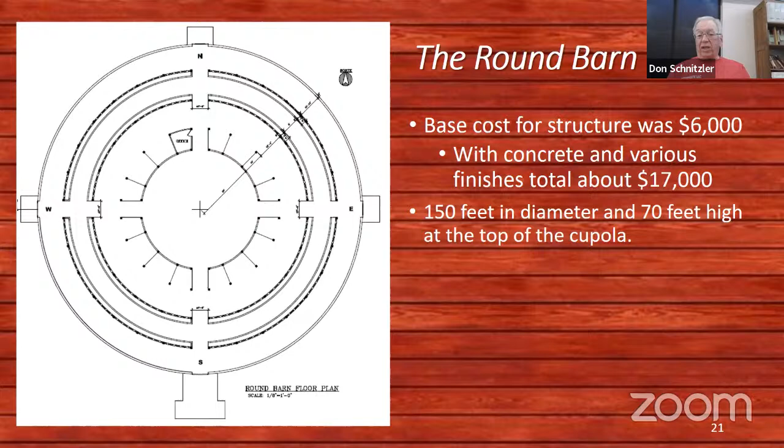And once they had that, the first job, and it was literally the first concrete job that Felhofers did, according to a history I read, was to pour the round wall that surrounds the perimeter of the round barn, which was done on Thanksgiving Day in 1915. And they mixed all that concrete by hand. And then before the building framing could begin, they poured all those, you see in the picture, kind of pyramids, which were the piers that the 8x8 posts sat on. I didn't take the time to count them, but there's a lot of them. The posts had to have a foundation, so they poured all of those.

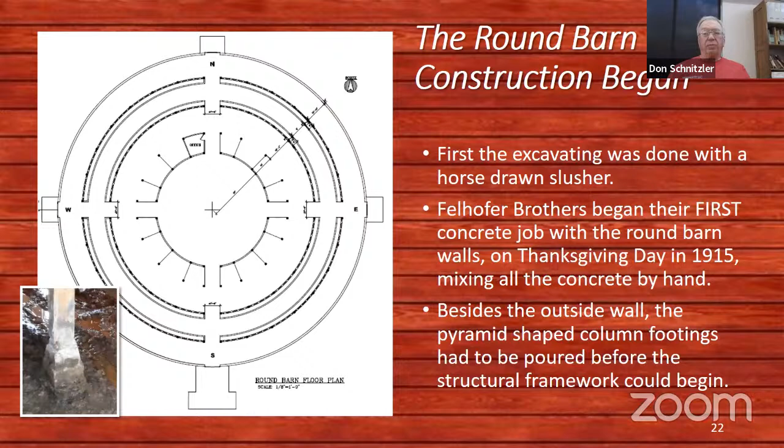So I hope when you go into the round barn and you go up into the center section, it's beautiful. It's a work of art to me, because I actually had a hammer in my hand in my life. And I appreciate the labor and the beauty of that round framing, and the difficulty.

Every board was cut with a handsaw, and lots of those cuts were miter cuts where there was an angle, and maybe some of them were an angle and then a compound angle. And that was by men who used a framing square to mark that with a pencil. Even if it was a compound angle, I don't know how well you can see that, but they followed that pencil mark around that miter cut with a handsaw, and it took a carpenter to do that kind of thing, and they were.

So it's different when you stand in that round barn. That picture doesn't do it justice, but you look up and look at how much structure there is up there, and that every piece was cut by hand. And think about that.

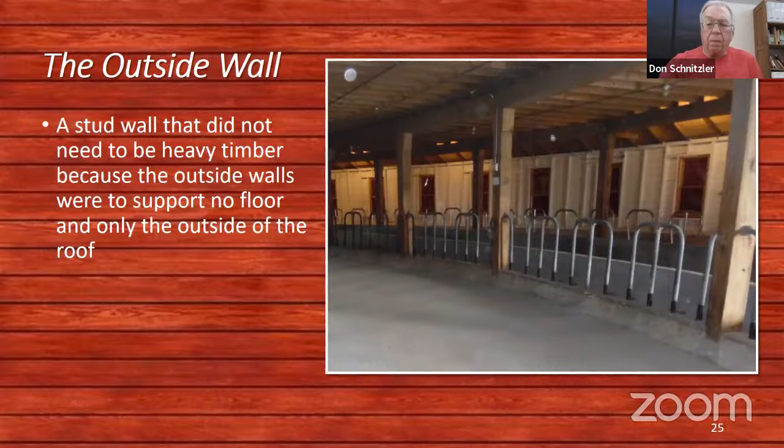It illustrates a little better, but in some of the drawings, and we'll have more in the pictures, there were 4 rows of columns that went all the way around the building toward the center, and that's what supported all the roof load and eventually the second floor load, the building weight and the live load, which is snow and ice and anything movable that would have been on the second floor.

And this picture is kind of neat because you can see some of the old stanchions. So this is a very original picture, and you can see the roof when you were out there by the stalls because the second floor wasn't there. So this picture is between 1916 and 1920, in that ballpark, when that floor was put in.

So the outside rows were solid squares. They took a log and sawed an 8x8 out of a red oak or white oak log. And that's not hard to do if it's, say, up to 20 feet, but when it gets 40 feet long, if you did do it, how do you keep it straight?

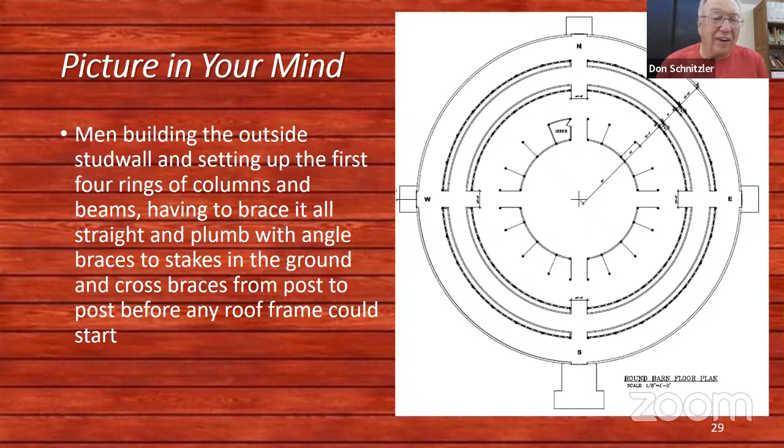And I picture carpenters like this didn't settle for pretty good. They had to be straight. And I've known carpenters like this that were old guys when I was young, and they got it right before they started putting a roof on it.

So once they got the columns set, they could begin building the roof framing in the winter. They're working off of ladders, and they're starting to build staging where they ran plank across from the outside wall over to the rows of columns, and they laid plank flat so they could walk on them and have some place to stand. But it gets high after a while, and it's slippery and it's cold because this is all winter. Think about that a little bit. There were no man lifts, no forklifts. They didn't have a crane, so that was all Armstrong and all climbing.

These round ring beams are kind of a mystery and a work of art, because you can see that they're pretty big. If the round barn was 150 feet in diameter, I don't know the diameter of the next one, the second one in from the stud wall, but it's big. And I can't imagine them building that up in the air. I think they would have built it on the ground and wrestled it up there somehow. I haven't read anything, but how'd they do it?

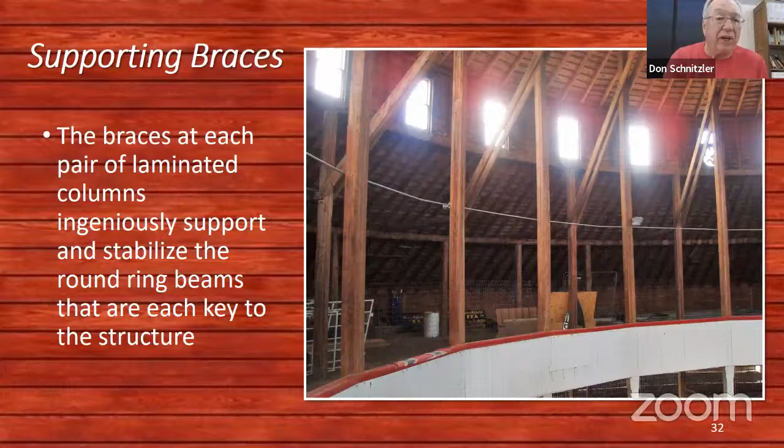And all through this thing is how they do that, how they manage. Maybe they had 4 or 5 guys on the average day, and they probably could get more help when they were doing something real big. But they didn't have the power equipment that the general contractor I work for has, with man lifts and forklifts and cranes and all the things that we have today. And they got it done. And this is a more difficult building.

So the round ring beams were quite a task and quite an ingenious way of going about this thing. You can see where the windows are, the stud wall sits on a ring beam and holds up the next ring beam and holds the windows in that sidewall. It's how they do it. It was up high, and it was difficult construction.

When you get way up there, I'm gonna see if you look. Here we go. If you look at where I put that pointer, that's the top end of those angle braces. There's no post because now you're inside the center circle above the show ring. So there's no post to hold that ring up. So when you look at that very top ring where I'm pointing, there's an angle brace there and one here, and they go all the way around, and that's what's holding this ring up.

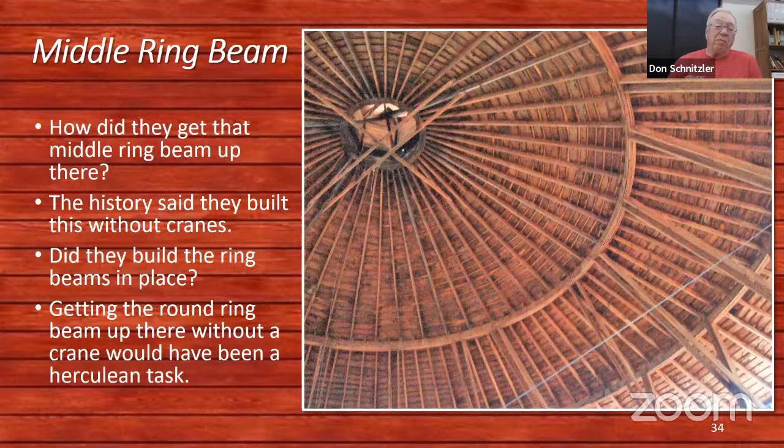Just out in the world, it had to be fairly scary. The top of the cupola is 70 feet, so they were up 50, 60 feet high working on that. We know that there weren't any cranes because the history said there weren't. We don't know if they built the ring beams in place. I think that wouldn't have been something they did, but maybe they had staging where they had lots of room to work. Either way, getting those round ring beams up there would be a Herculean task. And maybe they got a lot of help, but that's an interesting part of the whole building.

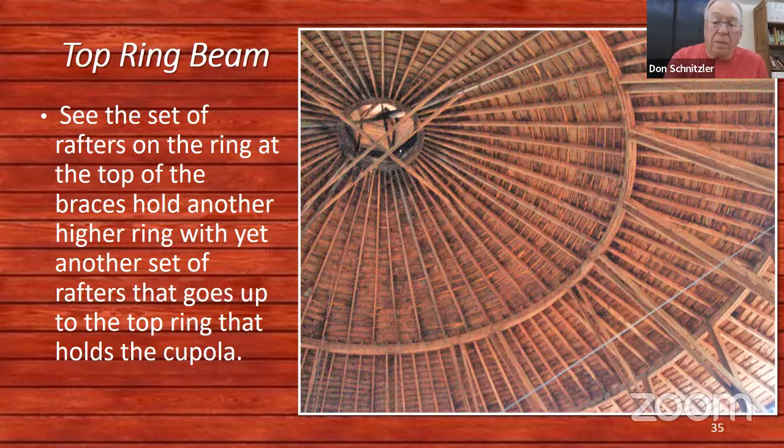Way up in the center is a smaller ring beam, and the rafters hold it up. There's no other framing, and then the cupola was built on the ground, according to the history book, and they wrestled that up. It isn't real big, so they did much more difficult things than getting that cupola up there. I imagine they sided and shingled it after they had it up there, to keep the weight down.

But there's a lot of how did they do it in this whole building, and being involved in construction, you start picking that out. But if you go stand in this barn and look at all these pieces, you start thinking about it. There's a lot of mysteries here.

So when you're at the fairgrounds, go to the center of the round barn and look up, it's a work of art. And think about the men who were there on staging that they built as they went up, standing on planks, temporary. It wasn't going to be that solid. They couldn't have been that nervous of guys, and they were building ring by ring, no forklifts, in the winter, cold and slippery. It had snowed, it rained. It was quite a task, quite a thing to accomplish.

When they shingled it, they cut the fingers off their gloves so that they could handle the nails, which people do today yet, because there were so many, 188,000 shingles. And I don't know, but I'm guessing at least 4 nails per shingle. I don't know exactly how they nailed them, but at least 4. So it was 50-pound kegs or boxes of nails, one after another.

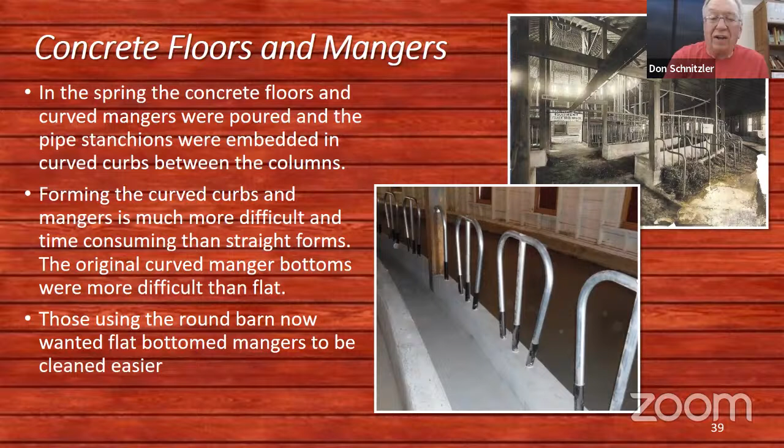Another thing is that the old barns always had manure gutters, but the people showing cows now don't want manure gutters because there's no manure in them barns. What I mean is, when a cow dumps, first of all, there's a lot of straw. They bed it heavily, but one of them kids is right there with a shovel throwing it in a wheelbarrow, and before there's much in that wheelbarrow, it's out the door, and they keep it so clean.

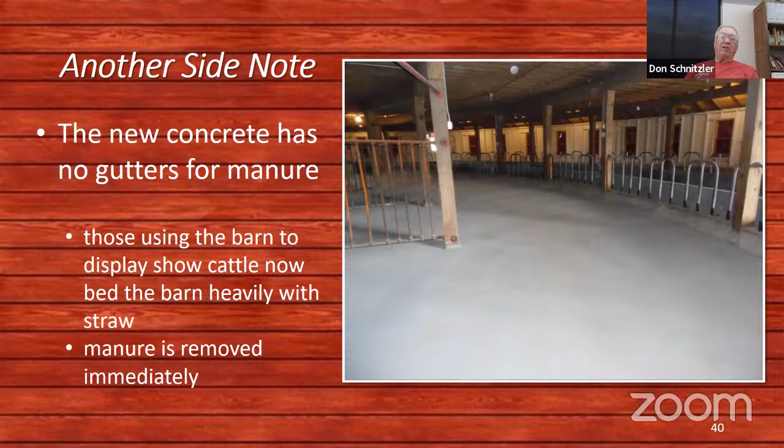That picture is when the concrete was brand new, but after the fair and after they get it all done and the skid steer's been through, and they're done sweeping, or I bet even right now you go look and it doesn't look that much different. They keep it real clean in there.

Box stalls were in the closest ring to the show arena, and they were metal pens, as you can see, for the small animals, calves and maybe sheep and goats and stuff like that. And the modern guys, they had curbs under.

You can see a concrete curb under the pen panels. Well, that was fine when you were cleaning it with a shovel to push the manure up against and get your shovel full. But if you're trying to use a machine, they're just in the way. So there are none of those.

And most of those panels are gone, except as you get to the hallway where you go into the center circle, so that they can use the skid steer, and it's much easier for cleaning. But that's how an old barn, back in the day, that's how they were.

The second floor is interesting. There's a few different histories and news articles about what year it was, but the most likely one says in 1920, I think the Breeders Association and some others put up the money to put that second floor in.

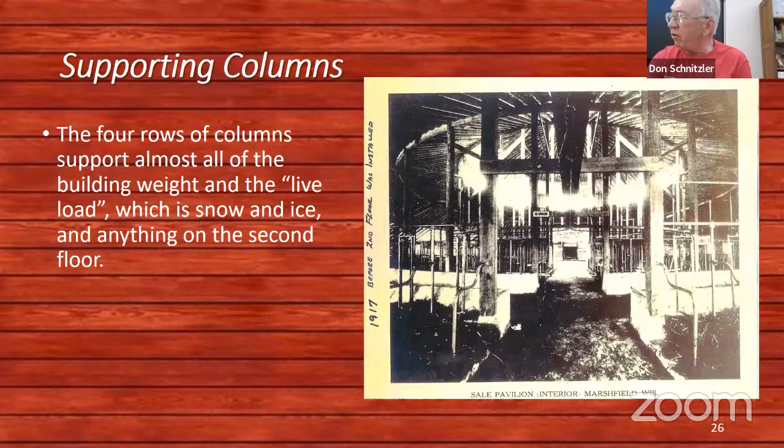Frank Felhofer did have plans. There's actually copies of them at the Upham Mansion. And I ended up getting a set because I was just so interested in it. And they're in this presentation, if I can buzz back far enough, and I'll be there in a minute. But to me, they're kind of works of art.

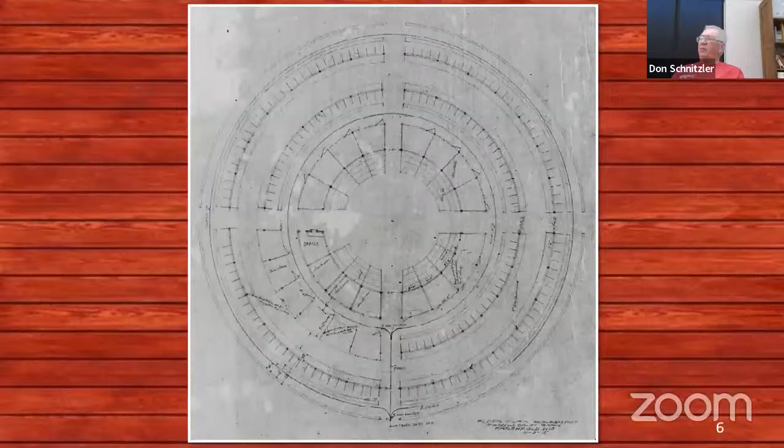Not that they're art, but this guy somewhere around 1915, 1916 is sitting there, and he draws this page. This is the 150-foot layout, and there's not a whole lot to go on, but there are various pages that are similar that have dimensions on them. So wasn't it that they had never built one before? That's one, and he didn't know how to do it, and he just figured it all out in his mind. I'm sure that's true because it was their first and only.

And like this next page that Frank drew, I've spent my life drawing plans and dealing with buildings, and there isn't a lot of notes there, but it's ingenious how the columns in circles held up these round beams, and that brace that's up at an angle braces the rows of columns and then actually holds up the very top ring that's at the end of that angle brace.

I'm sure he figured this all out in his head, and this is just a very small amount of plans for that complicated construction. So I think there are plans, but if an architect was drawing plans for it today, it'd probably be 40 pages. Because I handle a lot of those, and a story I believe I lived, both in bidding projects in the past and a little bit when I drew projects and put them out for bids.

And this wasn't true of me, but architects and engineers, like the people who drew the plans for this building, want to do it on a contract for a percentage of the gross cost of the building. It used to be 6%, now it's 7% plus.

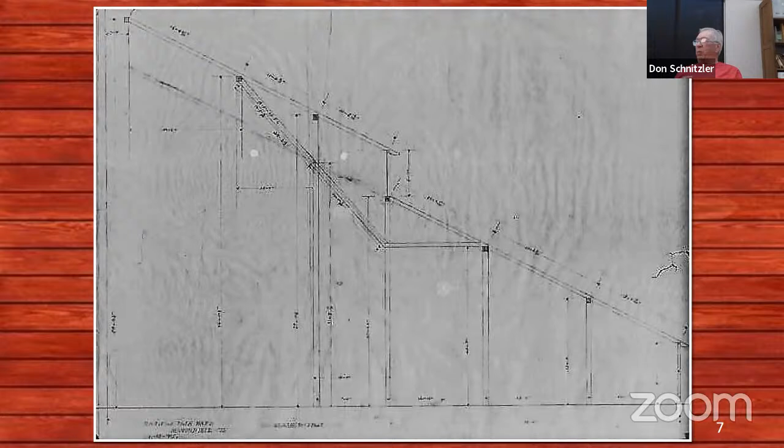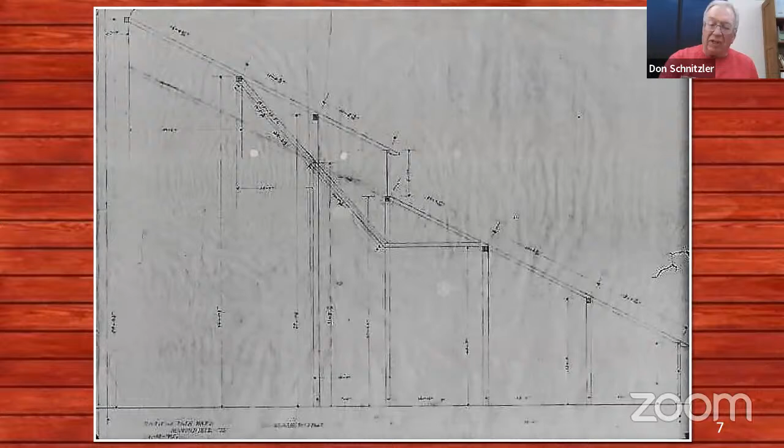And that's the kind of thing that contractors and builders and architects, that's what we deal with in our lives. I think I got to an answer to your question, but there actually are plans, but first he had to figure it all out in his head, and there's a lot more thinking involved. And then he took this little bit, and this is really very, very minimal. And there's the concrete, very minimal. And then as they did it, there was a lot of head scratching, talking between themselves, figuring out how they're going to fasten things. It's very interesting, complex.

The Fair Association has insurance, quote, unquote, on the buildings in the fairgrounds. Is there any kind of a value of this building? I mean, $500,000 to replace it, or, I mean, there must be some. The question is, again, what the replacement cost of that building might be. And I can't answer that. They certainly must have insurance. Do they? We'd have to ask them. Yeah. And who set a cost on that?

Somebody would spend a great deal of time figuring out the value of that material, and then trying to figure out how many hours of labor would be involved, and then all the concrete work. And I used to do that for a living. It'd be a task to do it. It's doable. Somebody has probably figured it out. And the other thing is there's more than one. There's computer programs now, and there's also a book of estimating sections that the name won't pop into my head, but they may use that book to find so much for an embedded post, so much for a concrete pier, so much per square foot for flat concrete. That's in a book that I used to use. I don't remember the name of it.